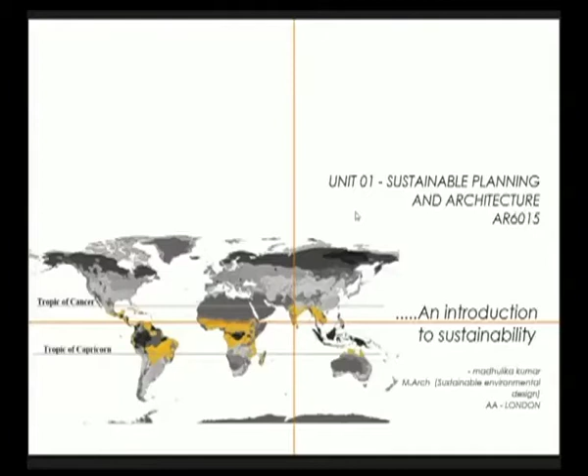Welcome to UGC lecture series for B Architecture. Today's subject is Sustainable Planning and Architecture, and today's chapter is An Introduction to Sustainability. The presentation is divided into 5 main categories: introduction, brief, concepts, ethics and vision, and conclusion.

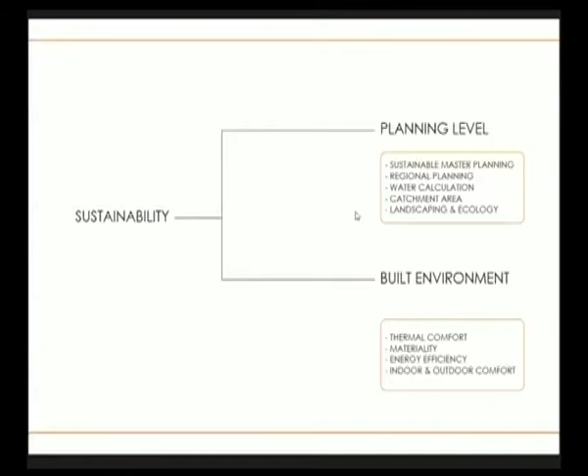Sustainability can be divided into 2 main chapters: planning level and built environment. Planning level consists of water calculation, sustainable master planning, regional planning, landscape and ecology, whereas built environment consists of achieving thermal comfort, materiality, energy efficiency, and indoor and outdoor thermal comfort. It is basically whatever can be achieved to reach thermal comfort within the building environment.

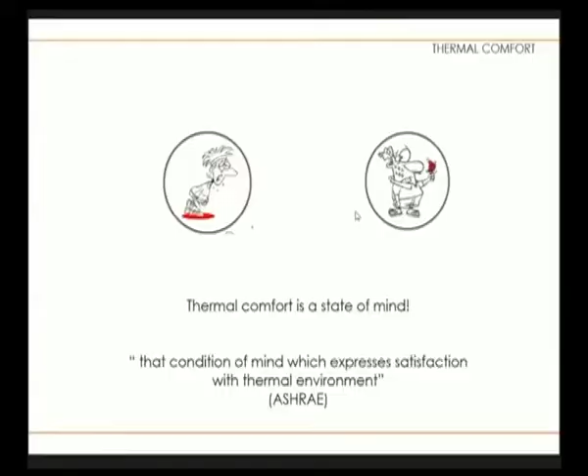So what is thermal comfort? ASHRAE defines it as the condition of mind which expresses satisfaction with thermal environment. So thermal comfort is basically a state of mind. Different factors which affect thermal comfort can be defined as environmental factors, psychological factors, and physiological factors.

Now looking at the environmental factors, it can be divided into 5 main categories: dry bulb temperature, humidity, radiant temperature, air movement and solar radiation.

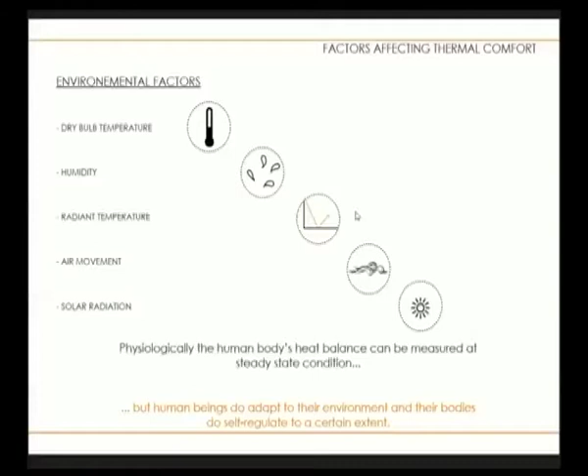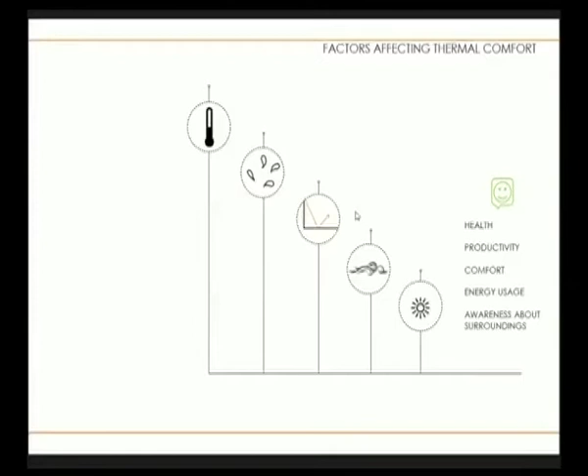Physiologically, the human body's heat balance can be measured by a steady state condition, meaning a moment of inertia, and not after the human is involved in a vigorous activity. But human beings do adapt to their environment, and their bodies can adapt to the surrounding condition to a certain level. These factors directly affect the user through health, productivity, comfort, energy use and awareness about their surroundings.

Moving on to physiological factors, different activities which contribute to the user pattern within the built environment also contribute to achieving comfort. So different activities can be like sitting, standing, exercise, running or dancing. All these activities produce different heat levels which affect thermal comfort, and this activity level can be measured in watts per meter square, and it differs for each activity.

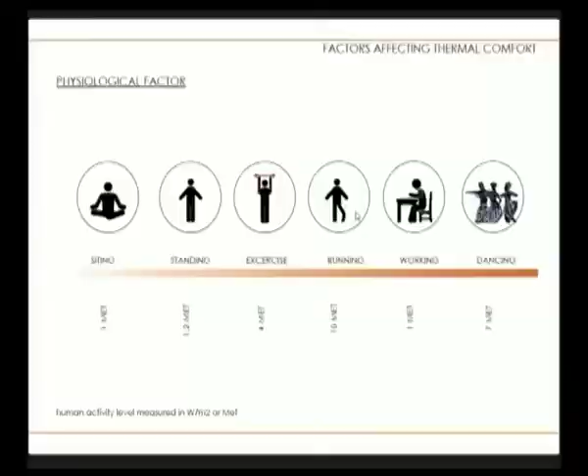Moving on to other psychological factors, there is clothing level. Clothing level can vary from 0, that is completely nude, to 2.5 to 3, which is completely using sweaters and jackets, mainly in western countries. So this insulation property adds to achieving thermal comfort.

We, being in a hot environment, prefer cotton clothing, whereas people from western countries prefer woolen clothing, which also adds to the factor and needs to be taken care of while designing. For a school building, the amount of clothing as uniform needs to be calculated while considering a design.

Psychological factors are adaptability, acclimatization, past experience, time of exposure and culture. Adaptability is when the body can adapt to certain changes in environment which can be altered to achieve thermal comfort. Whereas acclimatization and past experience is when you come out from a very hot environment, and even though the room is still a little bit hotter, you will feel comfortable because of the past experience of the outside environment.

And time of exposure: if you are exposed to an uncomfortable thermal environment for a short period, it does not make a significant effect on the user, but when exposed for a longer period, you need to take care of other factors like length of exposure, how long the person is going to stay, and other factors affecting them.

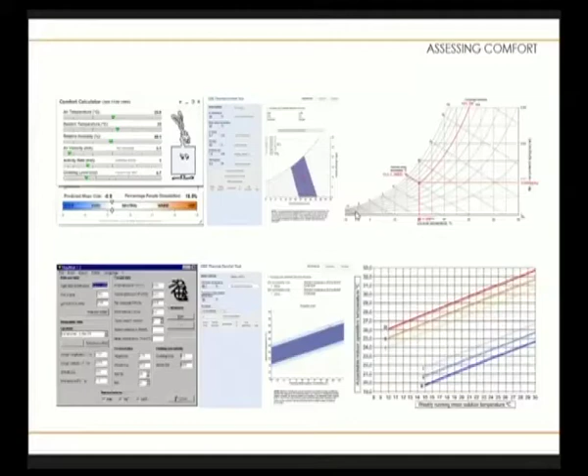And culture - basically, from which background you are coming, affects how you adapt to a new environment and these types of changes. So this comfort can be calculated using these different factors by comfort calculators and psychrometric charts, which have certain adaptable ranges to show the comfort level a person can achieve for different activities and clothing patterns. These are all available online and can be used to check indoor as well as outdoor comfort levels.

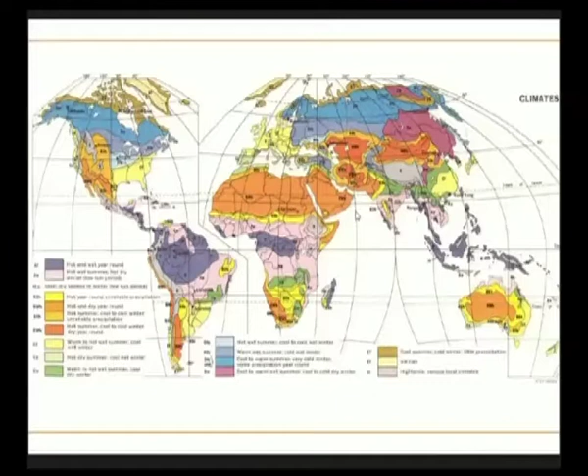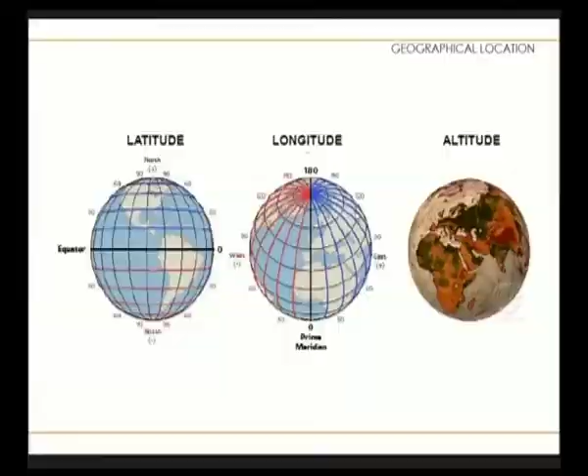So basically all these factors depend on climate. We have a vast variation of climatic zones throughout the world, and it does not just depend on climate, but also on where you are located - latitude, longitude and altitude as well. If you can see within the south of India, we have different climatic variation even in Ooty and Chennai, because of the altitude that place is located in.

So climatic variables include temperature, humidity, wind speed, solar radiation and illuminance. These are different climatic variables which have adverse and direct effects on thermal comfort.

So while looking at temperature, you need to look at dry bulb temperature, radiant temperature and sky temperatures, and not just indoor or outdoor temperature, and all these have different effects on the user. The next factor is humidity, where you have to consider relative humidity, vapor pressure and wet bulb temperature. All these come under the psychrometric chart and how different factors affect a person's thermal comfort.

And air movement. The air movement can become a crucial factor for having good effect as well as worse effect depending on the climate you are located in. On a warm and humid day, you would prefer a cool breeze to pass on, whereas on a cold day, you prefer not to be exposed to such cold and humid conditions. So the design aspect should consider the direction of the wind, wind speed and wind temperature as well.

For a hot and humid climate, northeast and southwest wind direction is preferred for tropicals, whereas when considering design in western climates, it's preferred not to exceed almost 1 meter per second of wind speed.

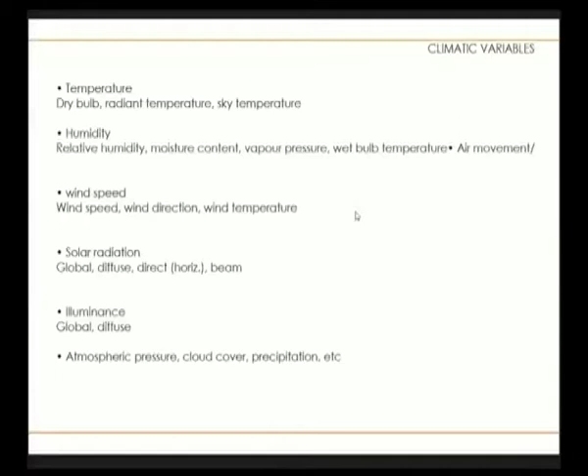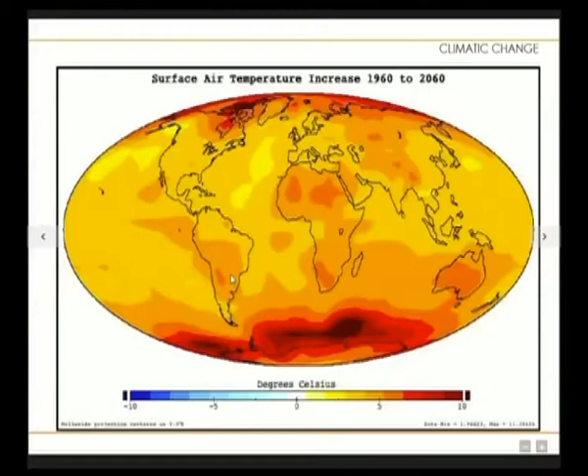And so climate change. We all know that climate has been changing since the past, and there have been studies carried out which show from 1960 to 2060, for about 100 years, this graphic shows the different parts of the world which have different effects from climate change. In India, we can see almost 3 to 4 degrees of temperature increase, but we can see adverse effects around close to Egypt and South America, which will be very close to 6 to 7 degrees.

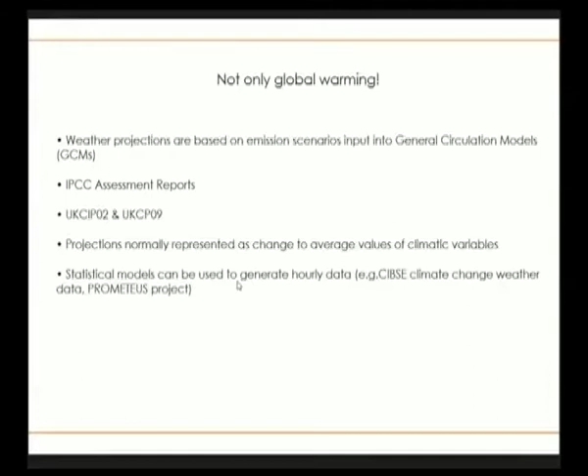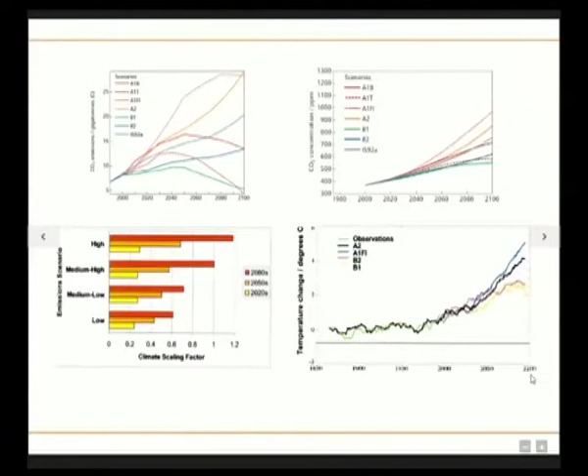And these are some charts which show different emission levels which have been increasing from 2000 to 2100, CO2 emission, CO2 concentration per ppm, and emission scenarios, which also affect the temperature increase. So you can see an adverse increase by the end of 2100 affecting due to all these emissions as well as the climate change.

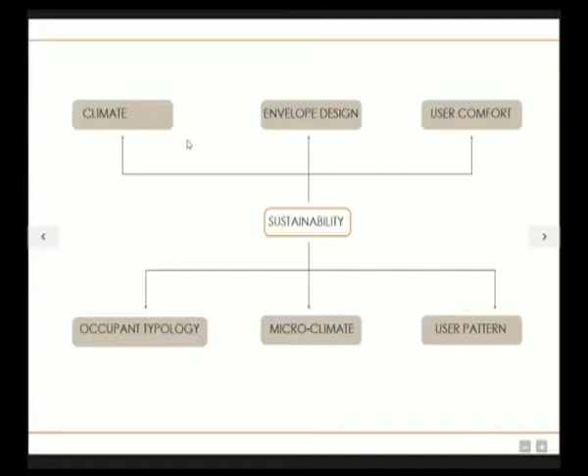So the question is how to achieve sustainability now. Sustainability is not just the usage of material, but it also accounts for the climate, envelope design, user comfort, occupant typology, microclimate and user pattern.

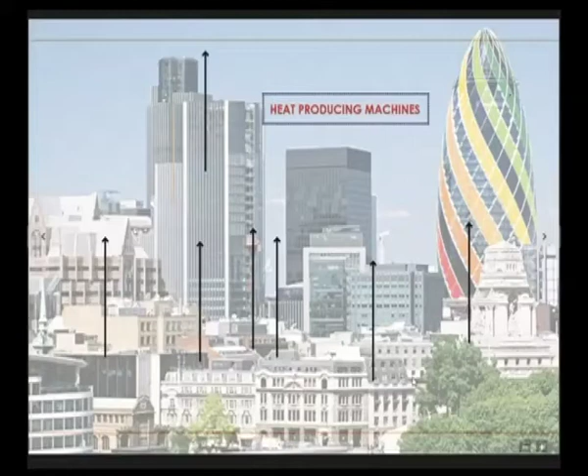Why is sustainability needed? What we see around us, all the buildings are just heat producing machines, is how we have to look at it. This is what buildings are telling us and what we are going to respond to. So all these buildings produce tons and tons of carbon dioxide and carbon monoxide.

So the issue is a vicious circle: urban warming from AC. When there is a lot of temperature increase, we depend more on air conditioning, which means more air conditioning equals more electricity generation, which equals need for more power stations. Electricity generation basically leads to carbon emission or other nuclear issues.

Most importantly, now we have to look at it like a global problem, which is AC culture, which is equal to an obstacle for sustainable design. So it's better not to create a problem and put on AC just to compensate it. Architects should have a closer vision on whether we need AC in the first place or not.

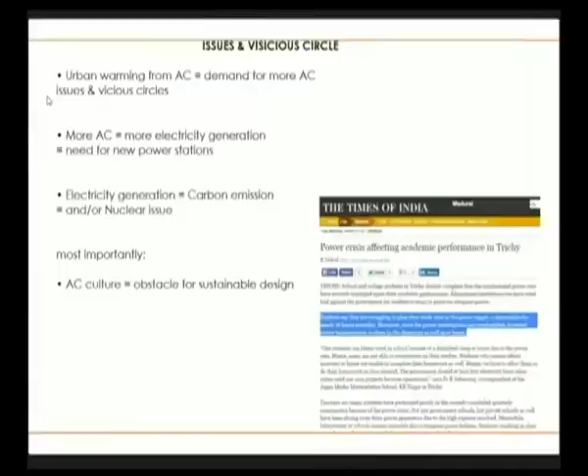So this is a report by Times of India which says there has been 16 hours of power cut every day in Trichy city, which is leading to low performance in academics in Trichy, which has to be taken care of because it's affecting the next generation as well. So as architects and designers, we should be sensitive to the environment around us. With increase of mechanical systems, carbon emission is increasing, which results in global warming and non-renewable energy depletion.

There are a few different ways to avoid this situation: by understanding the climate and user, using passive design strategies to improve energy bills, rather than mechanical systems bringing lots of energy issues. So we need to go back to look at the past, how we have been constructing before to achieve thermal comfort, and take some of the essence and learnings from the past, which can be used to make a better environment presently and for future needs.

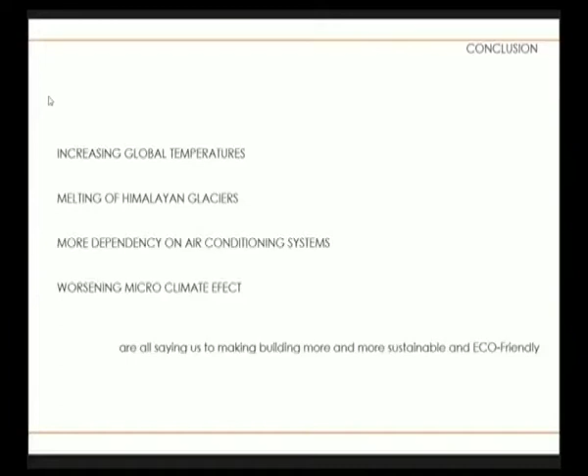Conclusion: increasing global temperature, melting of Himalayan glaciers, more dependency on air conditioning systems, worsening microclimate effect. All these are telling us we are going in the wrong direction. We need to stop and rethink the whole design process, and be more and more taking care of the climate and environmental aspects surrounding us.

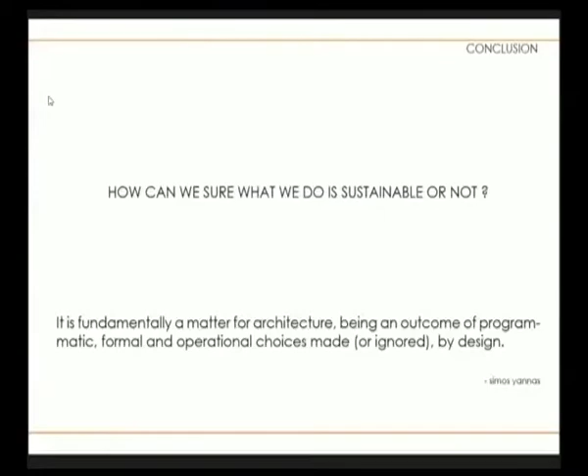So how can we be sure if what we are designing is sustainable or not? Sustainability is not something that can be taken for granted, or assumed by putting some material claiming you have achieved sustainability to 100%. It is fundamentally a matter of architecture being an outcome of programmatic, formal and operational choices made or ignored by design. What Simos is trying to say is it has to be a process in the design, and should not be an added layer to your design.

While making the design itself, you need to consider the different climatic factors and what is surrounding you, the microclimate effect, and what is the user pattern and typology the building is going to be used for, and the future scenario. It has to be adaptable not just for the time being, but also adaptable for future climatic ranges. So it can be tested in different tools and softwares.

These are some of the tools which can be used to measure temperature, wind speed, surface temperature, and lux level, which can give basic design intuitions to you, telling you how much you need to achieve and how much you need to do in your envelope design to achieve thermal comfort.

There are some modeling softwares which can also be used to test your design. These are DAYSIM, used for daylighting, and Gecko the same, and ENVI-met used for testing microclimate effects, and EnergyPlus and similar computation tools, all used to test the thermal comfort achieved within the built environment. And Ecotect, which we all know is environmental software, can be used to test sun path and wind using the WinAir plugin, and illuminance for daylight studies.

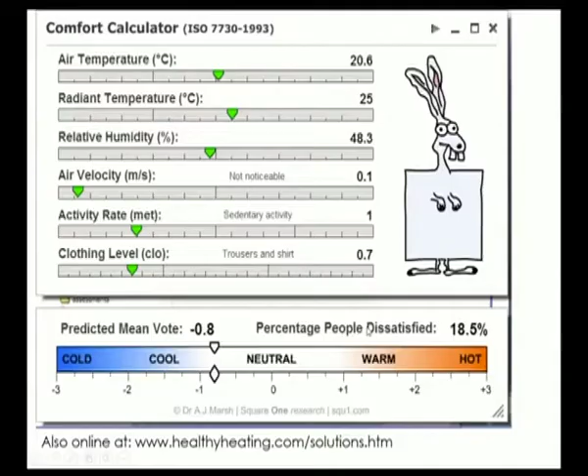Usually the percentage of people dissatisfied can be acceptable within 20 to 30%. If it is more than 30%, then you need to redefine your environment and the different factors that are affecting the thermal comfort.

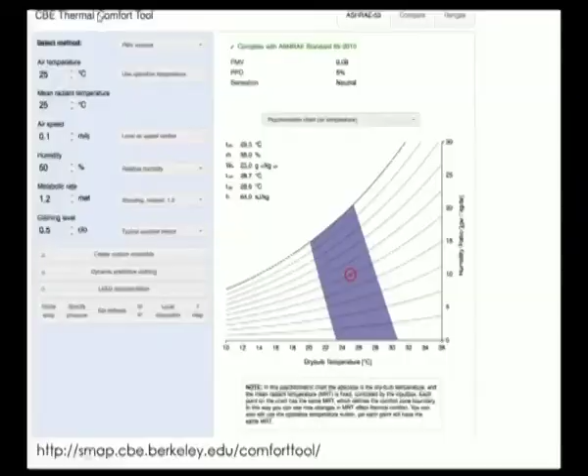Moving on to the next comfort tool, the CBE thermal comfort tool, which takes into account air temperature, mean radiant temperature, air speed, humidity, metabolic rate and clothing level.

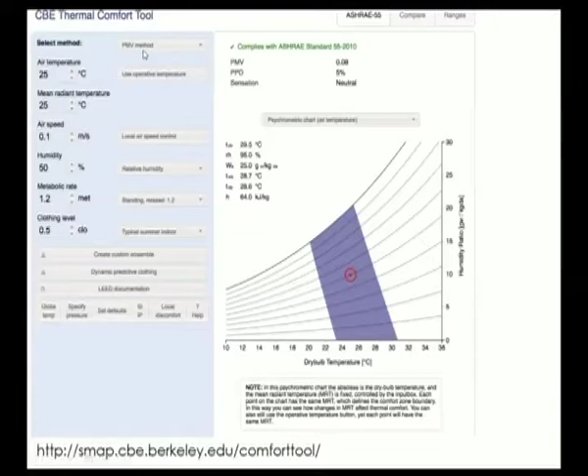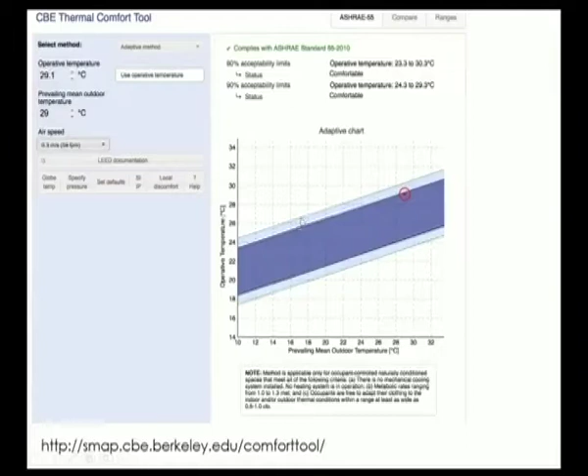So now, having a closer view at all these factors, we are moving on to the case study. The first is the climatic range for Trichy, which is in Tamil Nadu, India.

The comfort limit temperatures are calculated using Nicol and Roaf, developed in Pakistan, which shows the adaptive and cultural behavior in Pakistan is similar to that of the Indian context. The clothing, the surface, and the culture context are all the same, so we are adopting the same formula to find out the neutral temperature.

The neutral temperature Tn is equal to 17 plus 0.38 into To.av, where To.av is the mean average temperature of the month. This differs from January to December, with one neutral temperature for each month, multiplied by 0.38 and added to 17, giving the average temperature throughout the year for every month.

Based on this relationship, we get the neutral temperature against the monthly dry bulb temperature. A comfort band is plotted using plus or minus 3 degrees Celsius difference, which gives 90% acceptability for occupants.

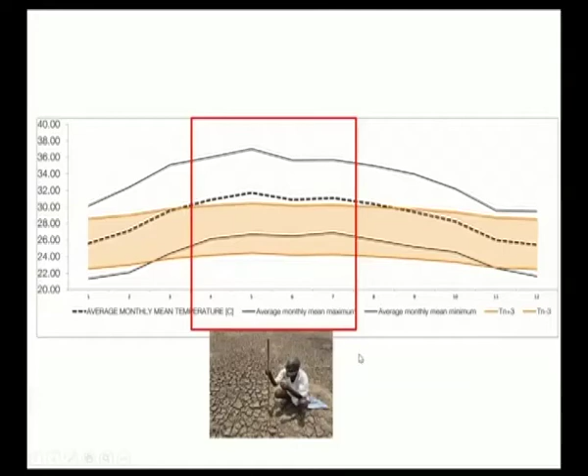Having a closer view at the climatic variations, from January to mid-February and from November to December it's usually the rainy season and the roads get flooded, which increases the relative humidity in the air. Whereas from April to mid-August it's completely dry and the rivers dry up, so the air temperature is very high and the relative humidity is very low.

You can feel the skin is very dry, and all these considerations for seasonal variations have to be taken into account in the design. The most important factor for a hot climate is wind speed.

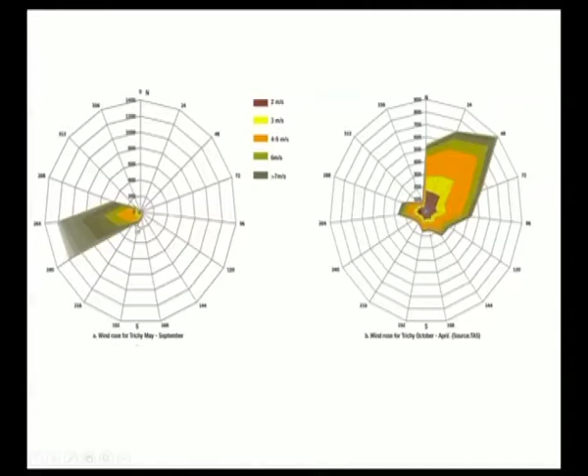As a tropical climate city, it has two different wind directions: from October to April it's the northeast, and from May to September it's the southwest, with different wind speeds occurring. This shows a 4 to 5 meter per second wind range, which is predominant in the city and can be used advantageously for projects designed there.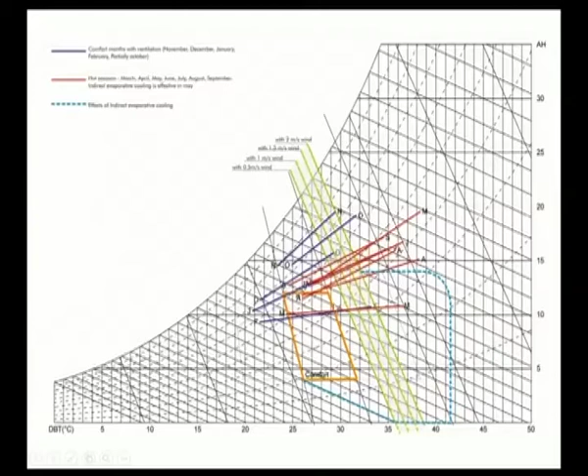Hot seasons vary from March to September, in which you need indirect evaporative cooling to elevate comfort levels. These green lines show the different wind speeds with which the comfort ranges can be elevated as well.

The next field work is on Kerala, at Kerala Kalamandalam, located in Thrissur. Kerala is located at 10.5 latitude and 76.21 longitude, experiencing a typical warm and humid climate.

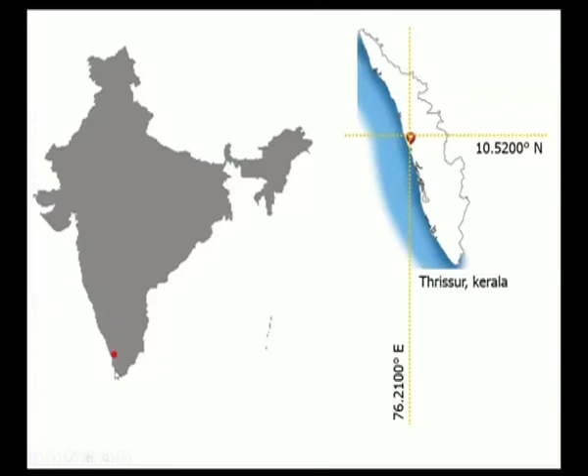Looking at the climatic ranges, it also has 6 months of monsoon, as we all know about Kerala. Usually up to June is the typical summer, and the rest of the months are comfortable enough.

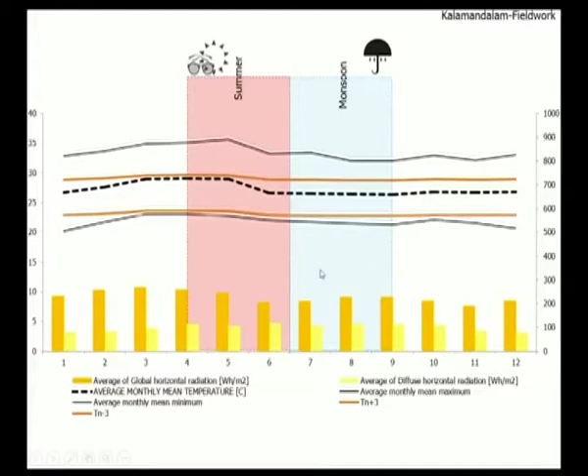It is a campus setting, a school for dance and music, in which the site is oriented towards the north. The site experiences northeast and southwest winds, and this is the sun path diagram.

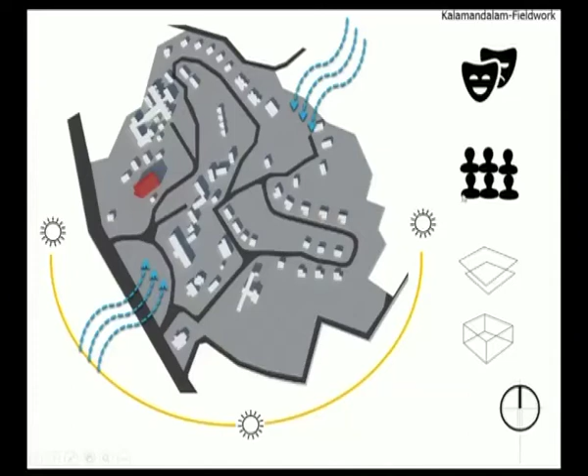This is an open campus catering to different needs between users and students, with built and semi-covered environments. These blue spaces are the teaching environments, located very close to the wind flow directions, which has to be taken into account while zoning the site.

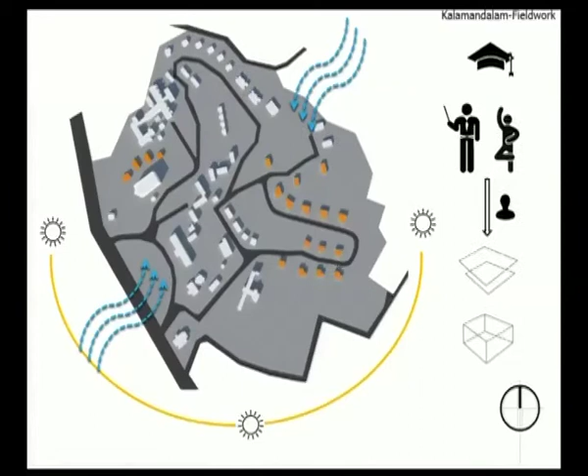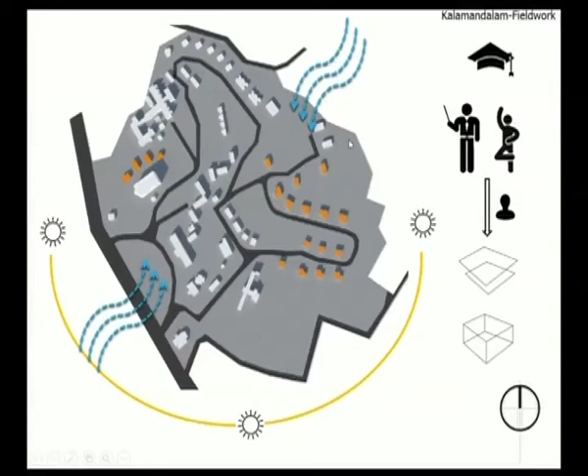These orange ones are the dance classrooms, also considerably close to the outer edge, which will have unobstructed wind flow from both directions, northeast and southwest.

Now moving on to one particular building, called Kuthambalam, which is a space to perform dance, like an auditorium. In the zoning of the Kuthambalam, you can see the changing room at the rear end, the performance space at the center, and the audience space at the front.

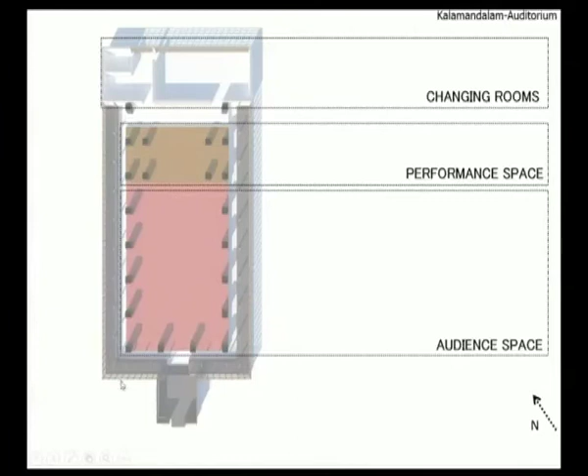You can see there are screening walls surrounded on all sides. This is how the solar screen works—there is no solid wall covering the building, which allows complete airflow throughout the building. These solar screens cut down the solar radiation completely and just allow the wind.

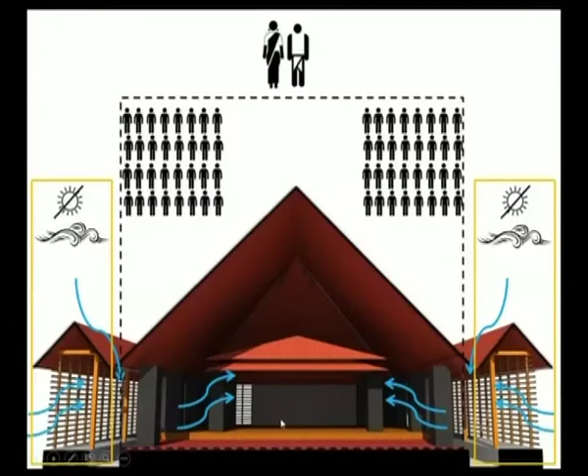These two solar screens act like a buffer space, and this elevated space is the audience space used for seating, while this wooden space is used for performers.

These snaps were taken at 12 o'clock noon, and you can see even during high solar radiation levels, there is no sunlight exposed to the audience space—it's just in between the two zones. This audience space is covered with high eaves, which eliminates solar radiation completely and just allows wind flow through the solar screens.

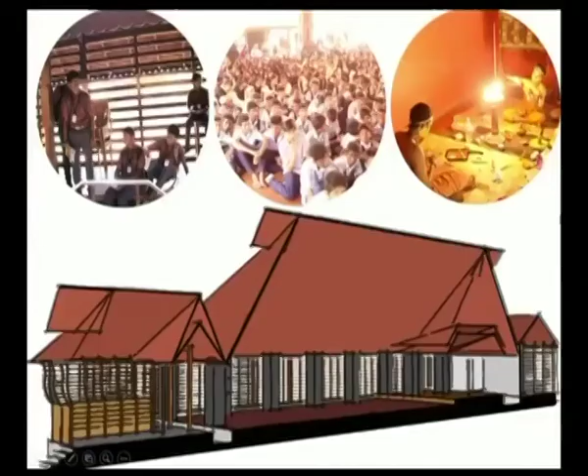This is a typical makeup room which uses artificial lighting during daytime. This accounts for solar heating of the environment, which has to be taken into account.

One more interesting factor is people sit on the floor to view the performance, so the flooring had to be made very cool to achieve thermal comfort. Different spot measurements were made at various points horizontally on the Kuthambalam, showing different air temperatures. It is interesting to note that even though air temperature does not fluctuate much, the surface temperature of the floor has significant reduction, which can be used to achieve thermal comfort.

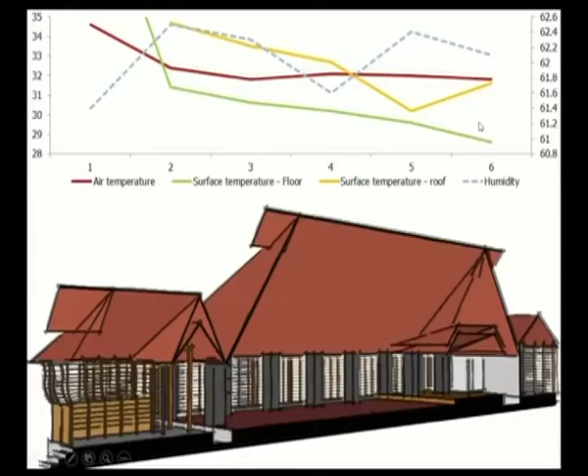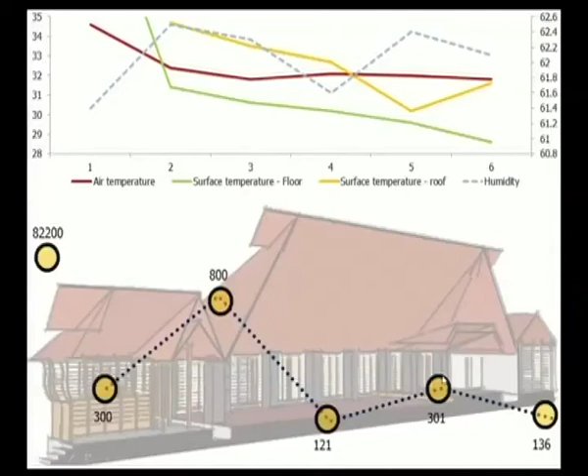These are different lux levels measured at different points, showing 82,000 lux, which is complete glare for a normal human eye. Inside, even though it's completely open, the solar screens are designed to cut down the glare, and inside it has a 300 lux level, which is perfect for viewing a dance program.

The account of dressing was also taken—the uniform used by girls were loosely fitted saris, and for the boys it was semi-naked upper body with the lower body covered by a towel and pajama, which both allowed space for wind to move in and for sweat to escape.

A small interview was conducted with students, which showed classrooms are comfortable but lack space and light, and they'd like to have classes outdoor or under a tree during evenings. This scenario is basically because high solar radiation takes away the relative humidity and makes the air dry, so when under a tree, due to evapotranspiration, it feels more comfortable.

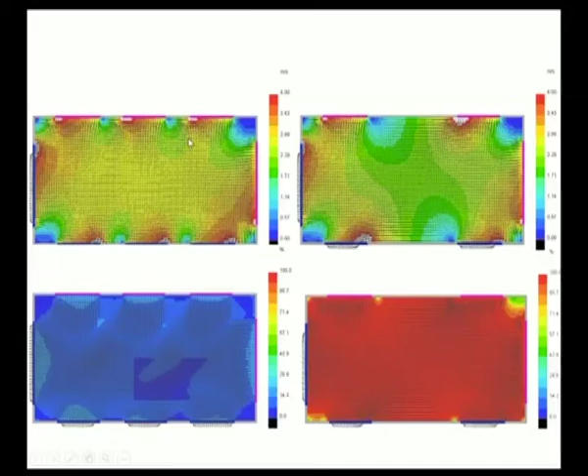These are different tests adopted by TAS, showing results with 30% window-to-wall ratio opening and 50% window-to-wall ratio. Even though the temperature is slightly higher, the 50% window-to-wall ratio has a good effect, and the percentage of acceptability is higher compared to 30%.

These are two dates in which the auditorium was studied in more detail, where the school begins at 9 o'clock and ends at 5 o'clock, and different spaces were used for different activities.

In the morning it was used for teaching, and from 11 to 12:30 there was a performance with 150 to 200 students sitting, from 1 to 2 it was a lunch break, and from 3:30 to 4:30 again it was a dancing activity. As we can see, when people increase from 80 to 150, there is a slight increment of 0.7 degrees Celsius.

This shows the envelope is designed in such a way that it easily releases the heat accumulated, even with a lot of people adding to the space. Even with 80 people dancing with a metabolic rate of almost 500 to 700 watts per meter square, the temperature increase is just 1.2 degrees Celsius, which can be neglected due to the wind flow throughout their body.

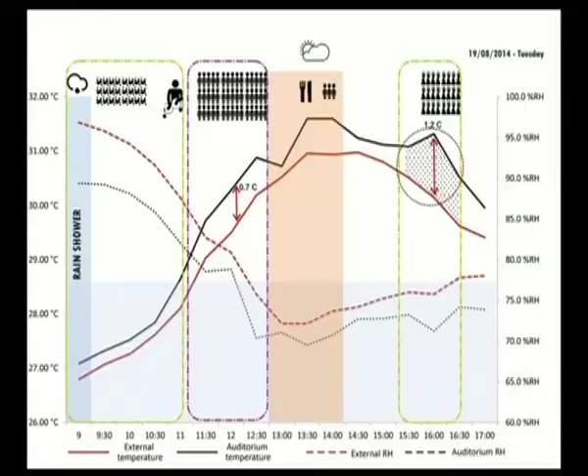These are different factors which have to be considered while designing, and the flexibility that gives for the project. The same study was carried out for the consecutive day, showing the same 1 degree increment when there are 80 people dancing inside the classroom with respect to outdoor temperature.

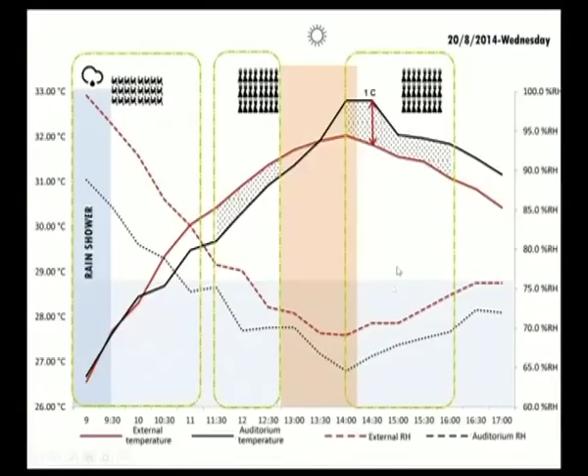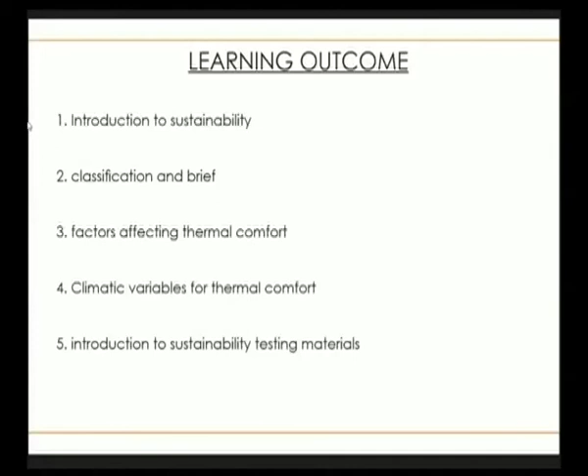Learning outcomes: from this PowerPoint presentation, you will understand a brief introduction to sustainability, classification and factors affecting thermal comfort, climatic variables for thermal comfort, and introduction to sustainability and testing materials.

Questions: How do you classify sustainable architecture? Define thermal comfort and its importance. What are the various factors affecting thermal comfort? How to prove sustainability for a project?

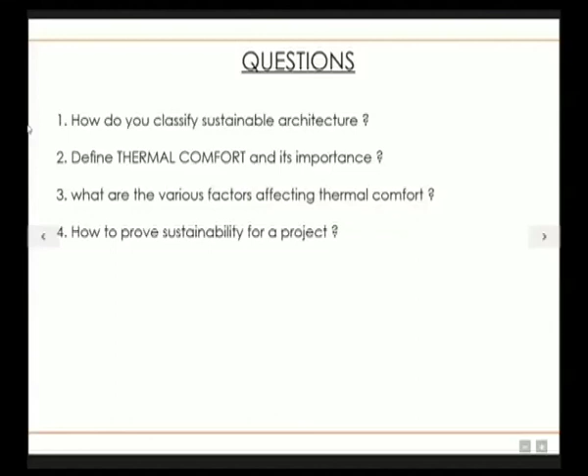To be continued—chapter 1 has a part 2 which includes an introduction to Earth's carrying capacity and statistical comparison with present and future, key problems and identification from Stockholm Resilience Centre, the maximal limit of the Earth, and our interventions to save the planet. Thank you.